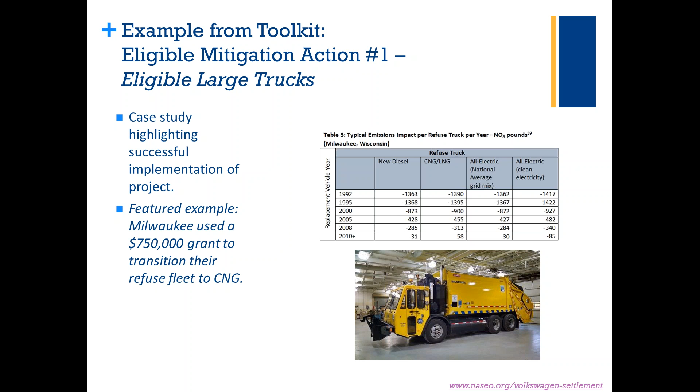One thing that is worth noting is that in the settlement, infrastructure can accompany investment in fleet purchases. That is an overview of the toolkit. I encourage folks to take a look at it. Again, it's available on NASEO's website. It is intended as a reference for the states.

Some additional steps for states may include, and these are things that we've highlighted in the toolkit, but I'll iterate them now also. We're urging states to consider projects that support longer-term goals, including the NOx reductions, but also looking at broader greenhouse gas reduction goals, economic development goals, energy assurance goals, etc. There are really a number of projects that can support these wider goals in addition to just reduction of NOx.

States may also want to engage stakeholders to understand what projects are the priorities in their jurisdictions and how projects may impact those communities that are disproportionately affected. States may want to explore various emissions tools and use some resources that are right for their areas. And similarly, they may want to examine industry-specific studies to learn about the most recent emissions impacts of

various technologies. A great way to do that, too, is to talk with your Clean Cities Coalition in your area or the representatives from industry to learn about the most recent information on technologies available.

That's a summary of the toolkit, but now we get to dive into the meat of the webinar. We are going to hear about a number of various tools that states may use to help calculate reductions in NOx emissions, as well as other emissions that they may want to take into account. So our first speaker, Andy Burnham from Argonne, is going to kick us off. I'm going to turn it over to Andy now.

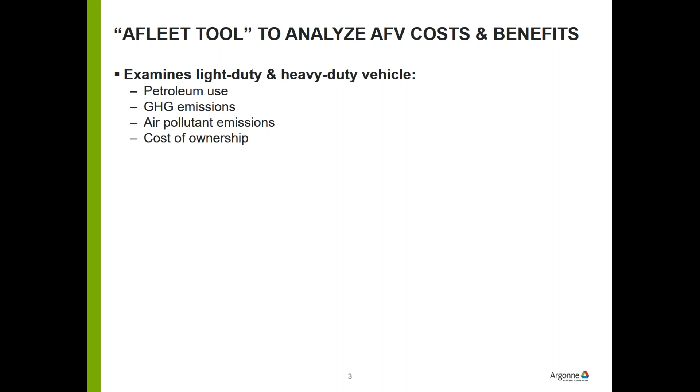And we developed the tool in Microsoft Excel, as we heard from our stakeholders that oftentimes you're getting information from fleets, and that they wanted to be able to easily import data and put it into Excel. The tool contains 16 fuel and vehicle technologies. I'll start with conventional, which is gasoline and diesel.

So depending on what you're comparing to, we typically compare gasoline for light-duty vehicles, and then for heavy-duty we compare diesel. We have hybrids, both gasoline and diesel, as well as hydraulic hybrids. Plug-in electrics like plug-in hybrids, as well as all-electric battery electric vehicles. And then we have a number of alternative fuels, including compressed natural gas, liquefied natural gas, LPG or propane, hydrogen, ethanol as E85, and various biodiesel blends such as B20 and B100.

The tool can include 7 major vehicle types. So these include passenger cars, passenger trucks, transit buses, refuse trucks, combination long-haul vehicles. Some of those categories are pretty broad. We have more specific data on 23 vocations. So an example is for the passenger car category, you might have a taxi cab, a police vehicle.

So we have vehicle miles traveled data, fuel economy, cost of purchasing those vehicles. So you can dig into real specific fleets. So we have a lot of default information for people to start with. The AFLEET tool was recently updated last year.

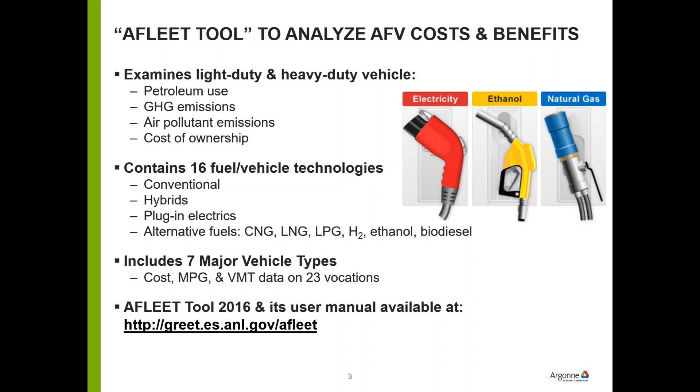So getting into what the tool does, it has three calculation methods, and which calculator within the tool you would use really depends on what your goals are. The simple payback calculator is used to do a quick analysis of the annual emissions and the simple payback of purchasing a new alternative fuel vehicle, comparing it to its conventional counterpart, such as gasoline and diesel. This gives a fleet owner a rough estimate of whether this fuel vehicle technology makes sense for their fleet.

Because while we provide a lot of default data, to do an analysis properly, you really need to use data specific to a fleet or to a specific case, because that's how you're going to really understand whether this technology works, because not every technology works in every single case. So this is the point of a tool like this.

The next calculator within AFLEET is the total cost of ownership calculator, which is used to look at lifetime emissions and net present value of costs over the years of planned ownership of a new vehicle. Basically this is a more detailed cost analysis that you can do for a fleet. It looks at things like depreciation and different financing options, whether you take a loan or not, and tries to dig into a little more detail for those who want to take that next step on the economics.

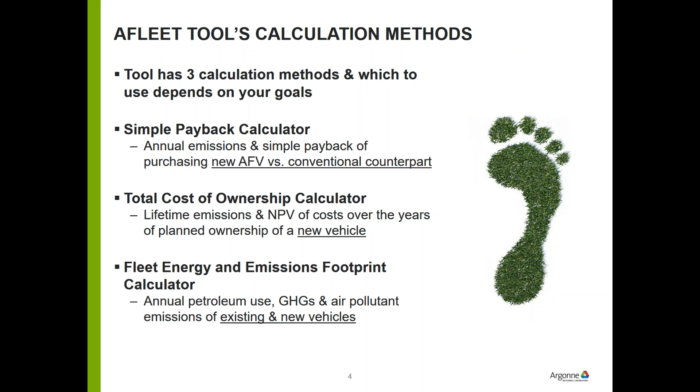Next, I'm going to talk about some of the major data sources that go into the tool. First off is Argonne's GREET 2015 model, a life cycle analysis tool. What we take from GREET is well-to-wheel, or WTW, life cycle petroleum use and greenhouse gas coefficients. We're trying to look not just at greenhouse gas emissions or petroleum use from a vehicle only; we want to look at emissions and energy use upstream.

A good example is electric vehicles. In that case, the electricity is generated at a power plant some miles away, so we need to incorporate those emissions and energy use to do a proper comparison. We also take some fuel economy data from GREET, and some of our alternative fuel vehicle-specific emissions data are taken from there.

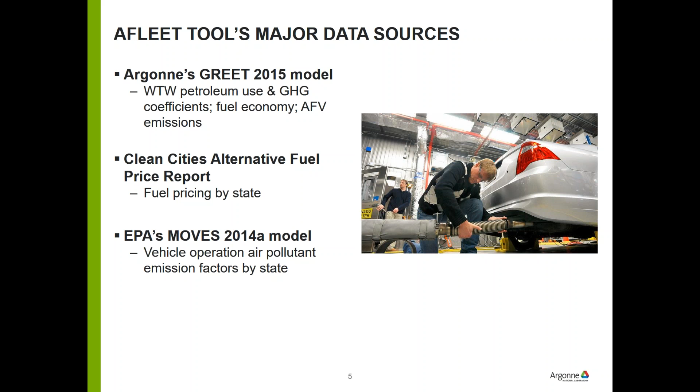Next is the EPA's MOVES 2014A model. What we get from that is gasoline and diesel vehicle operation air pollutant emissions factors by state. In the next slide, I'm going to get into the specific details, talk about how a fleet generates air pollutant emissions, so we can talk about NOx and how we do these calculations. So we use MOVES to, again, generate emission factors for gasoline and diesel vehicles.

Well, why don't we use MOVES for natural gas or propane or some of these other fuels? MOVES is really focused on gasoline and diesel, as those are the vehicles that are predominantly driven in the United States. So they have a lot more test data, a lot more information on that. The data on other alternative fuels is not as good. So we have decided we're going to use gasoline and diesel as our baseline.

And so what emissions do we get from MOVES? NOx, PM10, PM2.5, VOCs, and CO. What MOVES does is give in-use emissions. I think that's an important thing to think about, when we're talking about the purpose of this money, that we have to really understand what the emissions of vehicles are in use when they're actually on the road.

We can get data on certification, and that can tell you a lot. It can tell you how these vehicles do on certain duty cycles, but it doesn't give you the whole picture. And so MOVES tries to really look at in-use emissions. There's continuing research coming out, and I'll talk a little bit more about how these factors play into alternative fuels, but it's important to remember that this is in-use emissions, trying to understand how these vehicles operate in the real world.

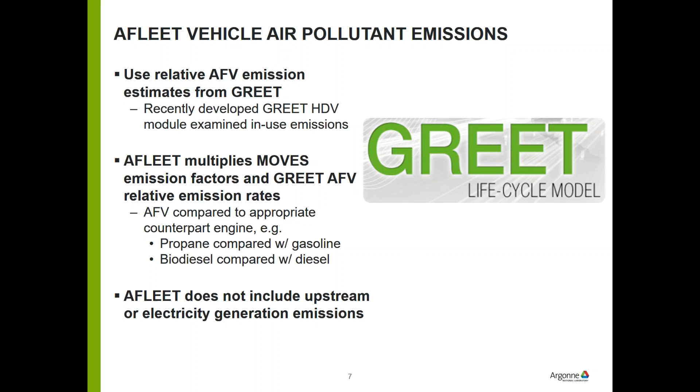So, talking about what we have and then some of our updates. We're going to update AFLEET this year, and some of the things that we're trying to include are the option to examine heavy-duty vehicles with low NOx engines. So I had mentioned this before, that California has low NOx standards, basically 50%, 75%, and 90% below the 0.2 grams heavy-duty standard. And right now there are natural gas engines that can meet the lowest standard, 90% lower. So we're incorporating some of that data into AFLEET for the next release.

We're also looking at idling emissions and idle reduction technologies. When we crack into MOVES and get into some of the nitty-gritty details, we can get some of that information. So we're working to incorporate that in AFLEET. And then we are trying to think about how we can include upstream and vehicle production emissions.

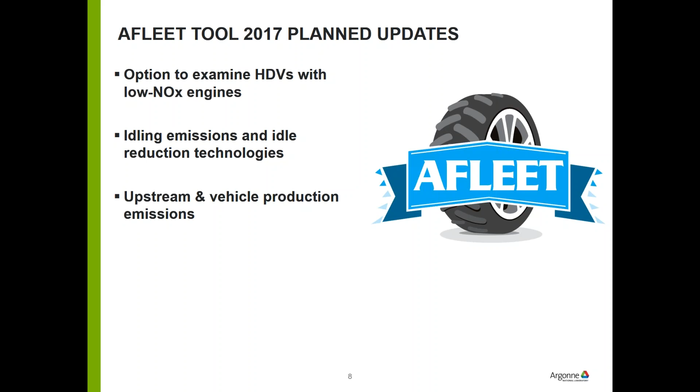So it is a tricky area, and it might be just kind of something optional that we'll provide. But that is something that we're thinking about, that we could include electricity and upstream emissions, because we do get that information through the GREET model.

We're going to add new fuels such as renewable diesel, which is becoming popular in California and the West Coast. And then we're working with another national lab, NREL, to develop an online user interface. So right now the tool is spreadsheet based. There's benefits of that, but then an online user interface has other benefits for user friendliness and being able to walk through and do some more simple calculations.

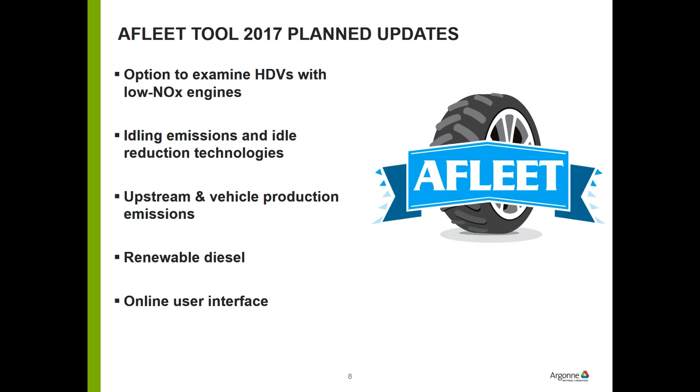So in summary, Argonne has developed AFLEET for the Department of Energy Clean Cities program to assist stakeholders and fleet operators nationwide. AFLEET can help estimate the economic and environmental costs and benefits of alternative fuel vehicles. It can inform new vehicle purchases, and then it can examine the energy and emission footprints of existing vehicles. Default data is provided for pretty much every key input, but using your own data makes your analysis more meaningful.

As well as, I kind of went into some of the details about how we do these in-use air pollutant emissions calculations. Our use of MOVES and Argonne's GREET models are the two key sources.

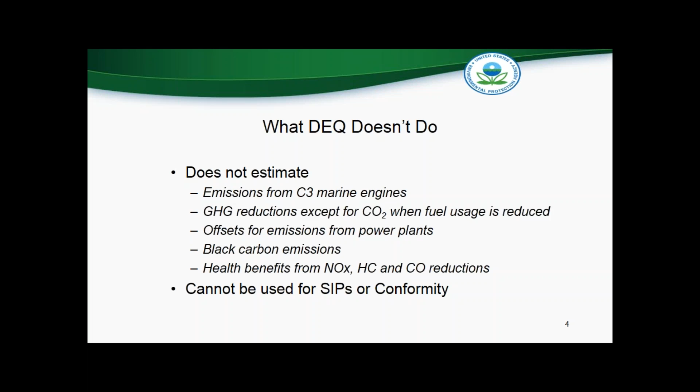The way it works is there are sort of two different ways depending on what you're doing. If you're doing an engine or vehicle replacement, the DEQ generates your baseline emissions, and then it looks at the emissions from your new engine or vehicle, and it subtracts the two, and those are your reductions.

If you're doing a different type of upgrade, such as an emission control or idle reduction, what it does is the DEQ generates your baseline emissions, and then it takes the reduction percentage that comes from either the EPA or the California Air Resources Board verification and certification programs.

I don't know if you're familiar with those programs, but both EPA and CARB look at different technologies, and they verify that the reductions that the manufacturer is claiming are actually valid. And particularly for our DERA grants, you have to use a verified technology.

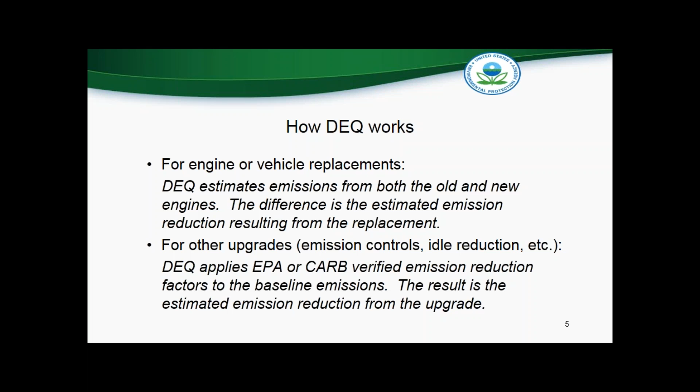The assumptions in the DEQ are for the alt fuel, CNG, LNG, LPG, and really anything else, we don't really have a good source for that data. And so what we know is that no matter what fuel the engine uses, it has to meet the diesel standards. And so we use the diesel standards as a surrogate for these alt fuels.

The only exception is for CO2, and the DEQ takes the gallons of alt fuel that you're using, and converts it to diesel equivalent before it does the calculation for the CO2 reductions.

When estimating the lifetime reductions, we use the median life. You can change that if you've got better ideas about how long you think your particular engine is going to last. But we do have a cap, so you can't say your engine's going to last for 100 years and you're going to get reductions for 99 of those years.

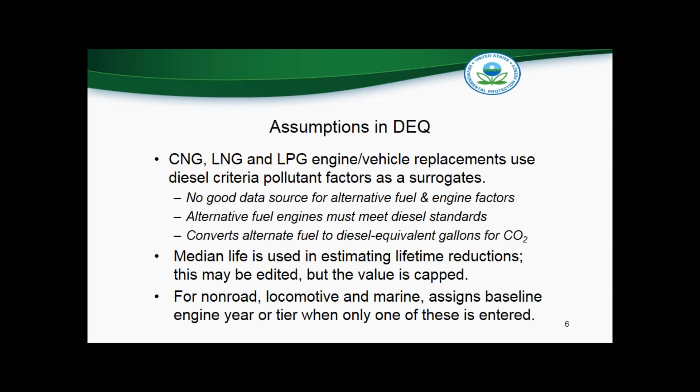The other thing is for non-road, locomotive, and marine, the DEQ asks that you enter either the baseline engine model year or the tier, or both if you know them. If you only enter one of them, it will assign the other one. So if you enter the engine year, it will assign the tier, and vice versa, which may not be exactly right, but based on what you've told us, we make our best guess at what that should be.

Our data sources for the DEQ are, as the AFLEET model, MOVES 2014A, and this is in-use data. It is for on-road only at this point, and we've been able to do a major update to our on-road module using that. For non-road, locomotive, and marine, we use EPA regulatory documents. And for non-road, we also have some factors and formulas that we take from the NONROAD model.

The NONROAD model has been incorporated into MOVES, but the data itself has not been updated in a long time. So we don't actually use the data from NONROAD, but we do use some of the factors and some of the formulas that were developed for that.

And as Andy alluded to, the regulatory documents state what the emissions should be when the vehicle is new, but we do see deterioration sometimes in these vehicles, and it may not necessarily reflect what's actually in use. And as I mentioned earlier, the emission reductions for the different upgrades come from EPA and CARB verification and certification programs.

The strengths of the DEQ are that it's easy to use. You can save projects and go back and edit them, say, oh, I've got 6 of these, I thought I only had 4, whatever. You can review to make sure that your inputs are exactly the way you want them. And then once you do your run, your inputs and results are both downloadable in an Excel format. So you're able to have a record of that.

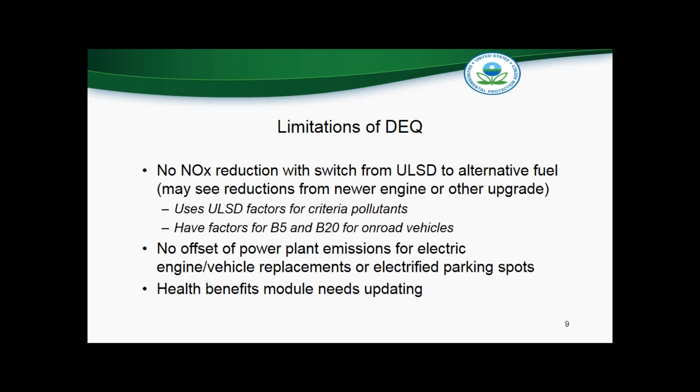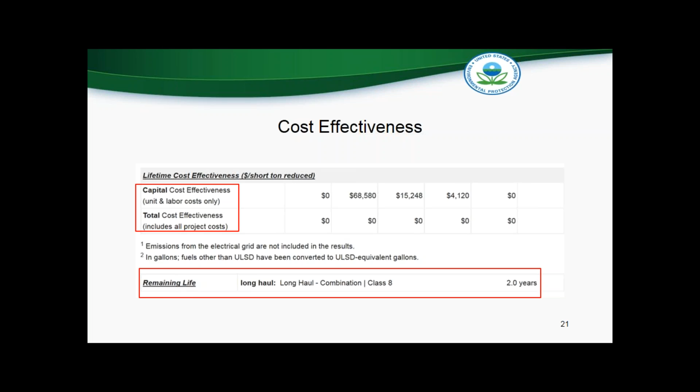Thank you. Thanks, Jeffra. That was excellent.

We did receive a couple of questions, and Jeffra, this one is for you. So one, are the vehicle lives stipulated on the DEQ? So can you see what the assumed lifetime of the vehicle is?

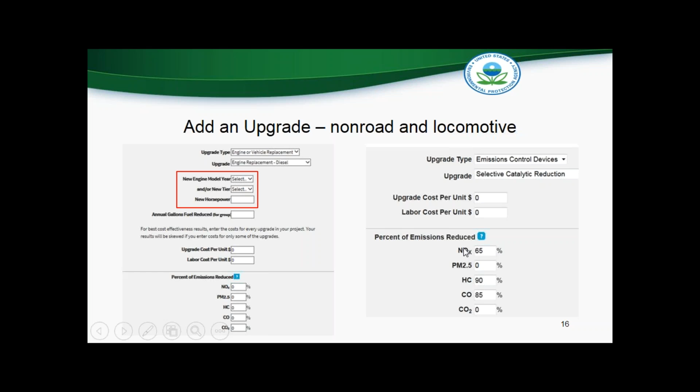Yes, there's a chart. Let me see if I've got a page that has it. As you go through, see these blue question marks? This isn't the one I want to show you, but here, this blue question mark, if you click on that, or any of the question marks, you'll get additional information about this particular screen. And this pops up and it has a chart for the median lives and the maximum lives that are accepted for on-road, non-road, locomotive, and marine.

Great. Excellent, thank you. Another question for you too is, a comment came in that setting alternative fuels to equal diesel is an automatic discounting of the alt fuel vehicle emissions benefits. For example, a natural gas near-zero engine has NOx that is almost up to 90% less than the federal certification for diesel. Can you comment on that for the DEQ?

Yeah, we just have not been able to find a good source to provide that information. If you have that information, as I mentioned, most of these fields are editable, and you can enter that information in. Let me see if I can see where that would go. Yes, it would go in here. If you would have a different, say, engine replacement. I mean, for those alternative fuels, you have to do an engine replacement, and you can enter those numbers in here. Excellent, thank you.

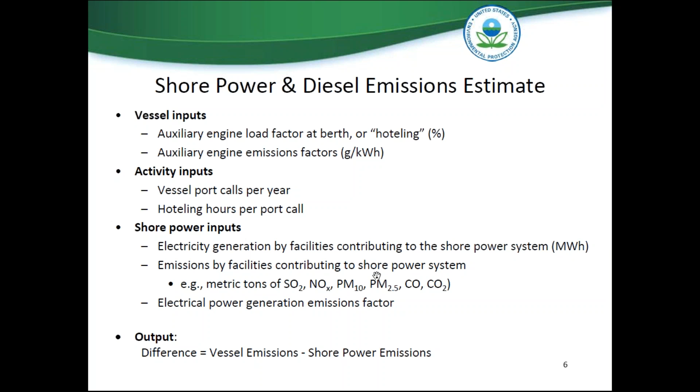And it looks at electricity generation by facilities, and you can look at facilities in a general area, like South Carolina or a state, or even an electric region, or even if your port just happens to have a power plant that you can hook up to, you can also use those numbers, and those numbers are in the calculator as well. After this presentation, I'll go over how to use the calculator, and just show some of the screens.

As I mentioned, the general model, just to compare, looks at the different eGrid regions. I made some examples here. You could look at the Northeast, Alaska, Florida, and California. And the eGrid regions are all over the United States. So depending on what engine you use, I made hypothetical engine power sizes here, like a passenger cruise with a certain engine, and I made it for those types of engines for each area, for Northeast, Alaska.

And all the blue is inputs, where the user has to know the specifications of the vessel. And what you get out is basically the vessel power emissions and the shore power emissions. It subtracts the difference, and you get a difference in metric tons. And there's also a percentage difference as well. So you could actually move this a little bit.

You can see in the Northeast, it calculates for NOx, SOx, and CO2. One caveat about this calculator is that it does not do PM and CO, because there are no PM and CO emission factors in eGRID currently. They're working on it, but it can be derived, and the paper goes into how you can derive PM and CO factors. But I think most of us, especially for this Volkswagen thing, are interested in NOx values, so this calculator

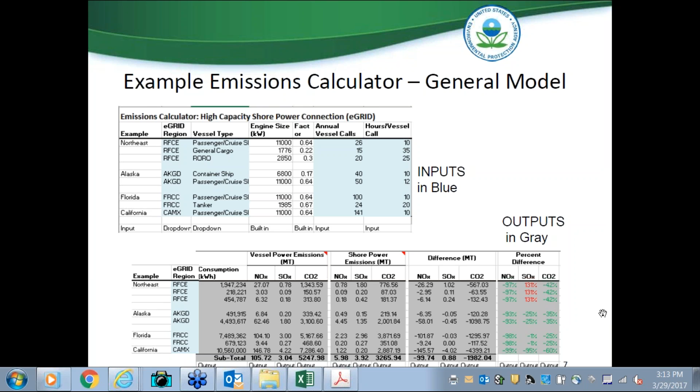This calculator is a general model. You can look at a general area, but the calculator has a second part, the user input part, which is down here. A user input, and a person can actually specify a certain power plant, and then specify the same inputs in blue, and they'll get emission results depending on what vessel you put and what area power plant.

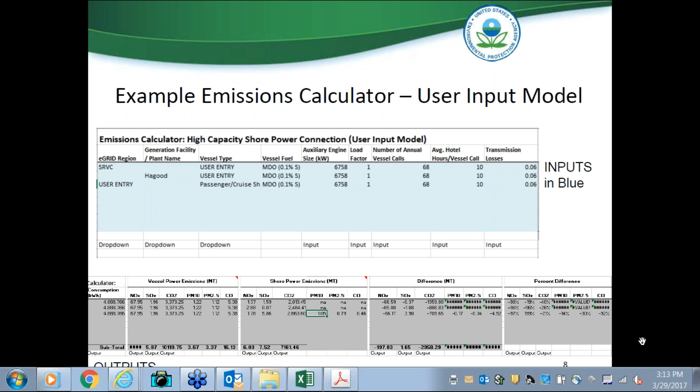Yeah, there's about 8,500 electric generation facilities around the United States. You could pick any one of those 8,500 or a combination of them if you wanted to, if you knew where their power was coming from. So at this point, if no one has questions about the report, I can show you.

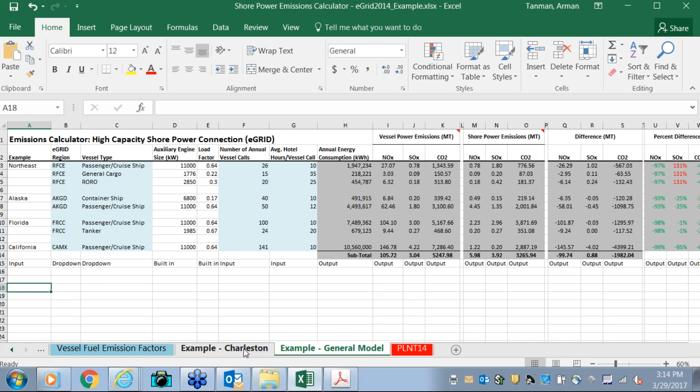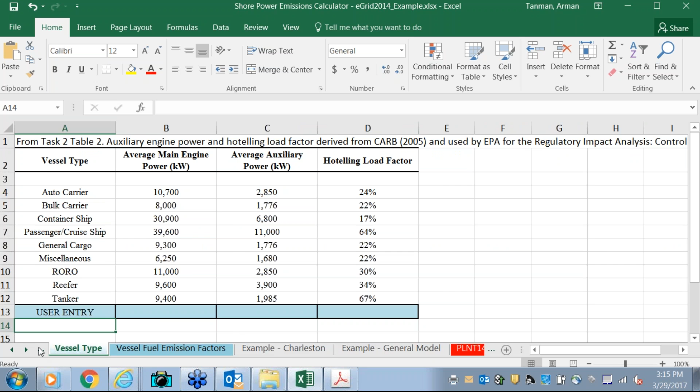So I wanted to show you how to use the calculator down here. The calculator is part of the paper, and on our website it will be a downloadable spreadsheet, and it'll come out just like this. And as you can see, when you click on this first eGRID region, you can select whatever region of the country you're in, including a user entry. User entry defaults to inputs that you can submit yourself, this line over here.

And these are the eGRID regions around the United States. You could pick any one of those regions, and these are the 2014 emission factors for them, and you'll get emission differences for these areas. Back to the example, if you do not want to use a region, and if you know your electricity is coming from a specific power plant, you can leave this blank, and you can pick a certain facility. And I think this is a solar facility, so of course you won't get any emissions for that.

On the vessel, you can pick the type of vessel you have, a carrier, a container ship, passenger ship, and we have all types of vessels here. And then you could also specify the fuel; of course, in the 200-mile vicinity of the shore, you have to use 0.1%. And if you know what your engine sizes are, you can put it in there. And the load factor while it's at berth, you can put it in here. We use 1 as a default, and the number of vessel calls, the average hours spent at berth. So this gets you basically annual hours, annual emissions.

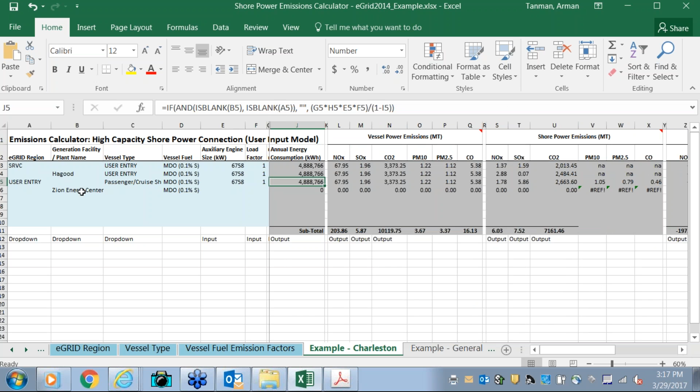And because we put a solar facility, there's nothing here. So the shore power emissions are basically zero. And when you go to here, it's zero also because we haven't specified the vessel yet. Specify a vessel back here.

And that's what I did for these top two rows. If you look over here, it gets percent differences for, say, this example in Charleston, South Carolina. You get a 98% reduction in NOx, 19% in SOx, 40% in CO2, and there's no PM and CO numbers, of course.

But within South Carolina, close to the Port of Charleston, there's a power plant facility. If you were tying into that, you get a little bit better SOx reductions because that facility, I think, burns natural gas, and you can see the emissions are much lower for SOx. And you can go to user entry and put your own emission factors in there, and you can get more specific numbers if you know exactly what your emissions are from your power plant or a combination of emissions.

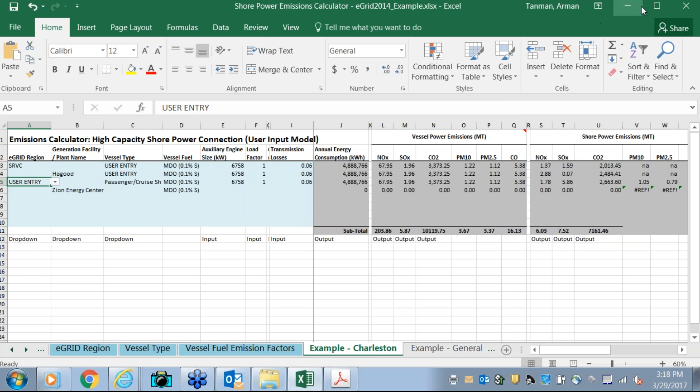I do have a question about shore power calculations. It looks like from your maps that the tool is really applicable to ports on the coasts. Is this also applicable to ports on rivers and Great Lakes? Yes, it is, because there's a user entry mode, and basically as long as you know what your vessel is. Again, this calculator only does it per vessel, while it's being connected to shore power, and it calculates the differences between the engine emissions and the electricity emissions.

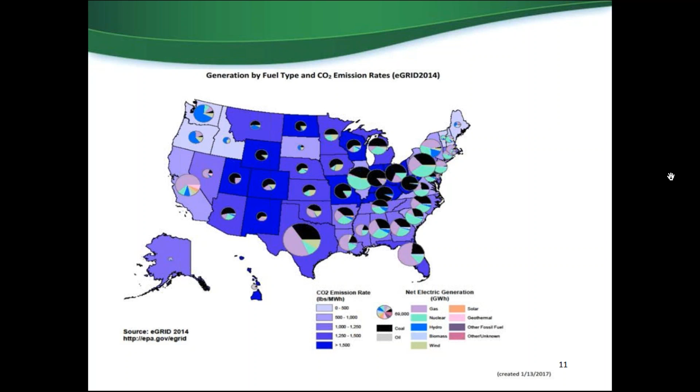One of the questions for Andy and Jeffra has to do with upstream calculations for electricity generation. It's our understanding that AFLEET and the DEQ don't include upstream emissions, and that could give an unfair advantage when calculating emissions from electric vehicles, because while the tailpipe is clean, the upstream should be taken into account. Can you guys comment on that?

This is Andy. I'll take a stab at that. Yeah, I agree. In the toolkit that NASEO came up with, they used eGRID to come up with some state-level emission factors. So you can come up with some numbers and get roughly where you want to be. There's issues with that, but I'll leave it there. But I think that is something we want to incorporate. It gets more complicated just because of where emissions occurred.

Something I didn't talk too much about is what AFLEET does: we try to go to human health impacts similar to what the DEQ has, using factors on the cost of a ton of NOx or PM on human health. But when emissions are in different places, the human health benefits need a more rigorous analysis. As I mentioned before, probably 90% of electric vehicle emissions are going to be outside of wherever you are, impacting someone else basically.